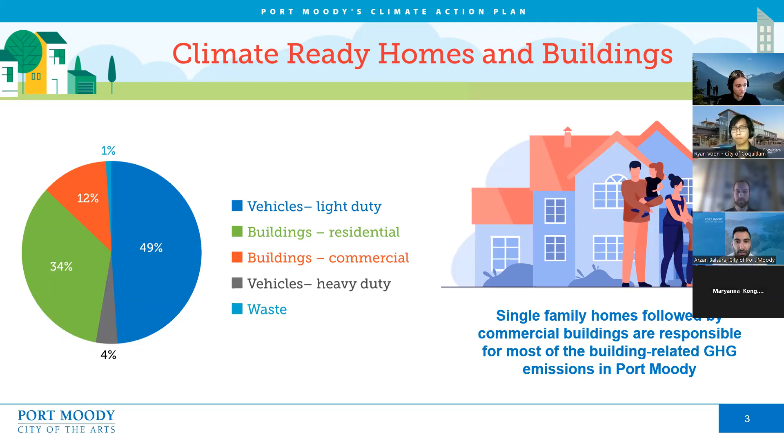So I'll just request that we go to the next slide, please. Port Moody has developed the Climate Ready Homes and Buildings Plan, which was adopted by Council last fall. The plan outlines specific actions that the city, residents, and business owners can take to make homes and buildings in Port Moody climate ready.

So what exactly is climate ready? A climate ready home or building is one that has been designed or modified to meet low carbon and high energy efficiency standards and manage many of the risks related to climate change, such as heat-related illness, poor indoor air quality, or damage from flooding or windstorms.

The screen shows a key target that the city of Port Moody is working towards, and you may be wondering what you as a resident can do to support this. One important thing to remember is that electric heating results in more than 90% reduction in greenhouse gases compared to natural gas heating, due to BC's clean renewable hydroelectricity. Today represents an important opportunity for residents to learn about climate-friendly solutions they can have control over, and that can have a major impact on GHG emissions.

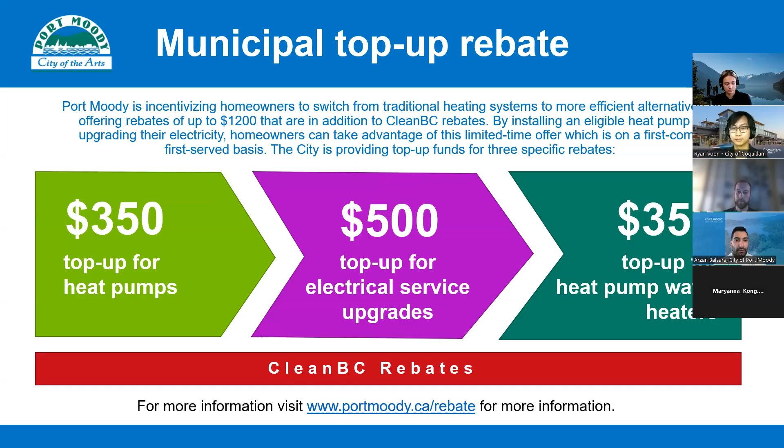You might have already explored heat pumps in the past and thought these things are expensive. Well, we've got good news. Port Moody is proud to say we will be offering top-ups on the already existing rebates provided by the province and federal government. We're offering $350 for a heat pump, $350 for a heat pump water heater, and $500 for any electrical service upgrades that might be necessary as a result of these retrofits. These are all on a first come, first served basis. As Ryan can probably attest, these rebates are pretty popular and tend to get picked up pretty quick. If you would like more information on these rebates or any others Port Moody is offering, please visit portmoody.ca/rebate. And with that, I will pass it over to Ryan.

Thanks, Arzan. Hi everyone, my name is Ryan. I'm a Sustainability Program Specialist at the City of Coquitlam, and thank you all for joining us today. I wanted to briefly share what the City of Coquitlam has been up to regarding our sustainability plans and strategies, and how heat pumps connect to sustainability in Coquitlam.

As part of the environmental sustainability plan, the city updated our greenhouse gas reduction targets to be in line with international, federal, and provincial targets. Coquitlam has targeted a 45% reduction in greenhouse gas emissions by 2030, and targeted to be carbon neutral by 2050. How do we get there?

The next stage in Coquitlam's climate action journey is the development of a climate action plan, which will identify the key policy actions needed to help the city meet those targets and help the community be resilient to climate change impacts. The city is embarking on this journey, and we're going to be engaging with the community sometime later this year. Please keep an eye out on the city's webpage for the latest updates.

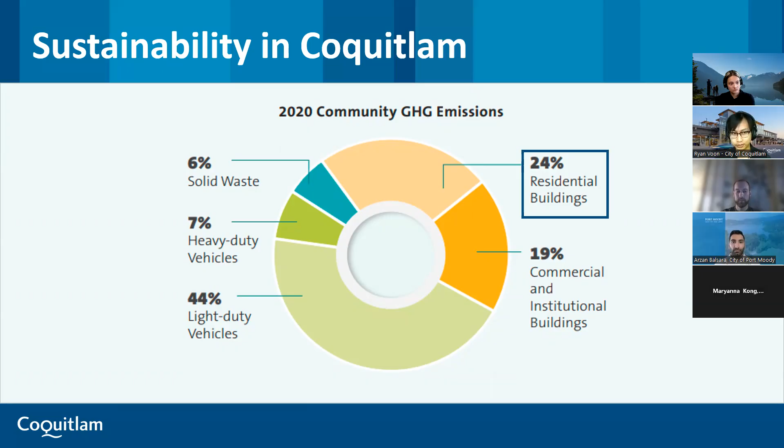Finally, if we go to the next slide, also happy to announce, like Port Moody, residents in Coquitlam have the opportunity to access municipal top-up rebates from the city. If you are living within the municipal boundaries of Coquitlam, you are also eligible for a $350 heat pump top-up, $350 heat pump water heater top-up, and a $500 electric service upgrade top-up, which is in addition to the CleanBC rebates you'll learn more about today. If you want further details on these rebates, visit coquitlam.ca/energyupgrades for more information.

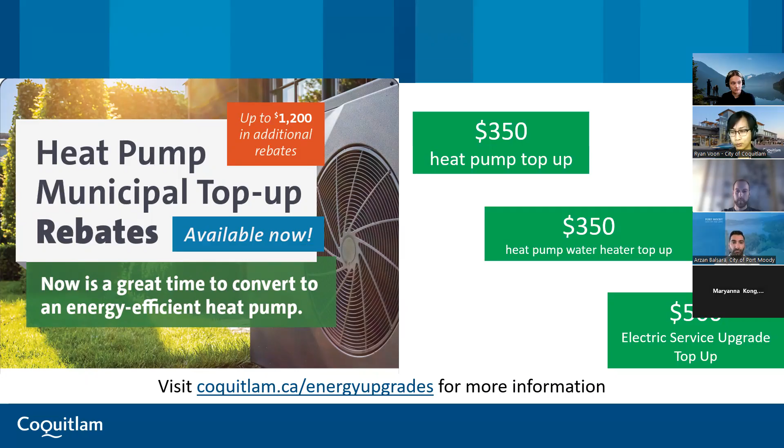And with that, I'll pass it over to Scott. Hey everybody, as mentioned, my name is Scott Walmsley and I'm the environmental coordinator for the City of Port Coquitlam. My role with the city includes the implementation of the environmental strategic plan, as well as the development of the city's urban forest management plan. I'm currently working on the development of the city's updated climate action plan, which is nearing its final stages. This new climate plan is intended to be a science-based plan focused on a low carbon resilience approach to climate action.

We're looking to integrate both emissions reduction initiatives as well as ways we can adapt to climate change. The plan is designed to assess and respond to climate-related hazards and impacts on 5 major sectors: critical infrastructure, natural systems, health, well-being and culture, housing, and economic development.

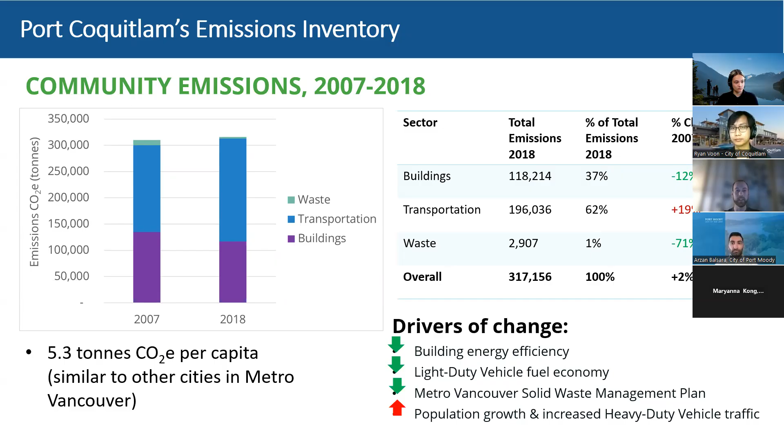If we go to the next slide, in Port Coquitlam our buildings take up roughly a third of our overall emissions. What's really interesting is you can see a change from 2007 to 2018, showing we were somewhat successful in achieving an emissions reduction at the building scale from the last time we did this work in 2007. Things that impacted this reduction include improving building energy efficiency, predominantly through the implementation of the BC Step Code. However, our overall emissions still increased a small amount during that time frame. That sends the message that even though we achieved some modest reductions, there's still a ways to go for us to meet those science-based targets, which is why we're here today.

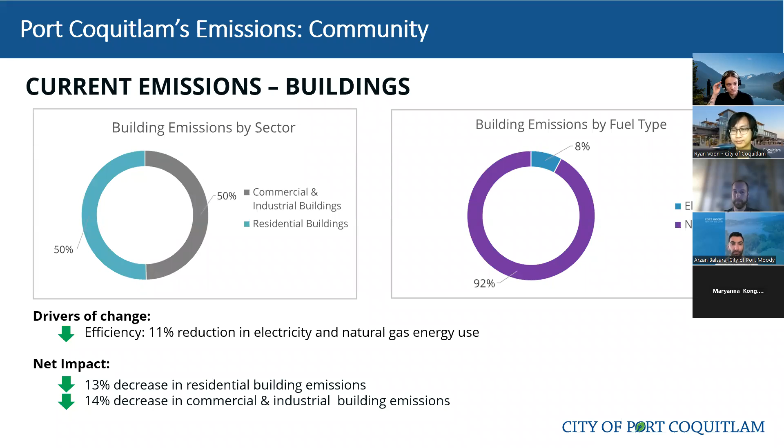Moving forward to the agenda today, we have a fair amount to talk about. I'll introduce heat pumps, why we're hearing so much about them, what a heat pump is, how they work. I'll introduce some of the most common types we're seeing here in BC, as well as some common myths that might be concerns about heat pumps that may not actually be true. A couple of tips to know before you buy a heat pump, including where to find a contractor, and we will of course be touching on rebates and grants towards the end of the presentation.

So why do we care so much about heat pumps? Why are we seeing them everywhere? We get a lot of ads on TV and radio. One of the biggest reasons is we hear a lot about climate change, and we see it day to day as well. We had the heat dome from a few summers ago and wildfire events throughout Canada in the last couple of months. It's climate change and extreme events like the heat dome and wildfires becoming more common that make it more important to look at how our buildings and homes contribute to climate change, as well as how we can adapt and become more resilient to the impacts of climate change going forward. Energy efficient upgrades are one of the best ways of achieving a more resilient and comfortable home as we experience changes to our climate.

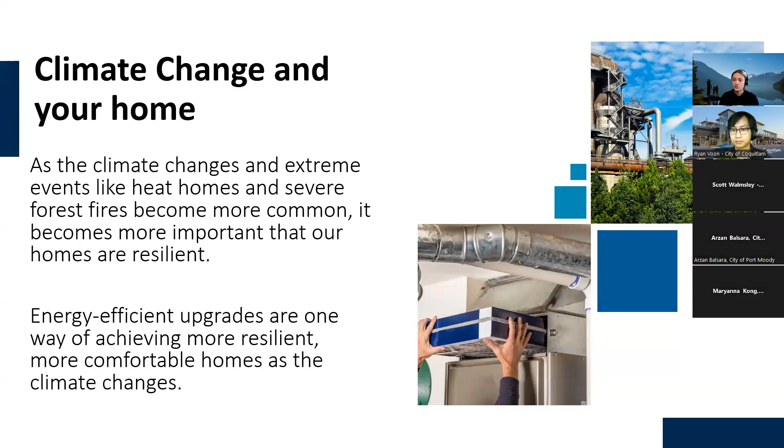Related to that, we have the CleanBC Roadmap to 2030. This roadmap outlines the provincial government's plan to lower emissions by over 40% by 2030. One of the primary methods they're addressing climate emission reduction is through fossil fuel to heat pump conversion. Switching to heat pumps is beneficial here in BC because we're fortunate to have some of the cleanest electricity—about 98% of it is hydropower, which is considered carbon neutral. Heat pumps run off electricity, so that's also why they can be so climate friendly. Yet we're still experiencing roughly 70% of our economy powered by fossil fuels, so how do we start thinking about shifting away from fossil fuels towards clean energy such as electricity?

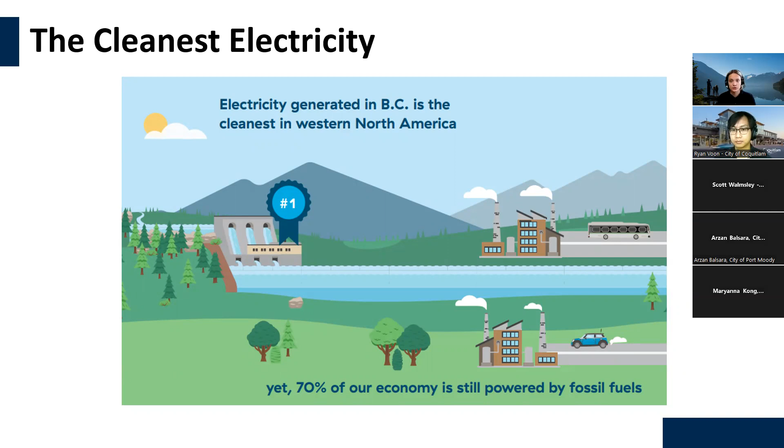A lot of us think electric vehicles have become so popular in recent years. We seem to get very stressed or concerned about idling a gas-fueled vehicle for maybe a few minutes outside. Meanwhile, if you're using natural gas or propane to heat your home, you are essentially idling your home 24/7. So shifting to cleaner means of heat, like a heat pump, has almost a greater impact than even something like switching from fossil fuel cars to electric cars.

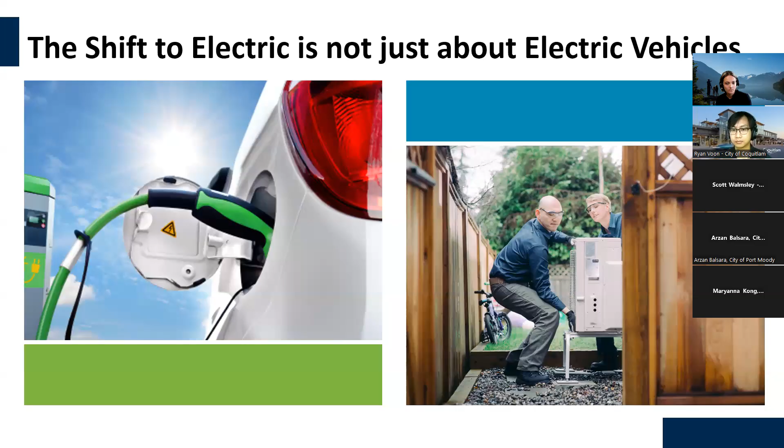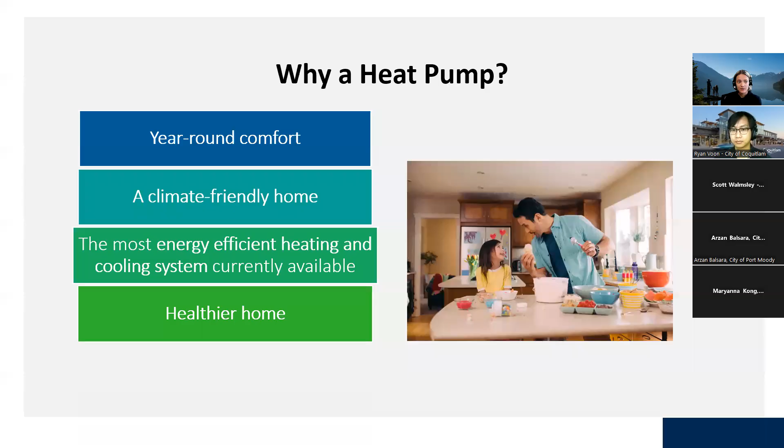There are a bunch of benefits when it comes to heat pumps, which is why they're such a topic of conversation. Going through some of these: year-round comfort, as heat pumps provide not only heating in the winter but cooling in the summer as well, so they're two systems in one. You'll also get a climate-friendly home, shifting off fossil fuels towards electricity. They're also the most energy efficient heating and cooling system available. You can have a healthier home with the air filtration heat pumps offer, and if you're switching from fossil fuel heating, you'll no longer be paying a carbon tax on your energy bill. Now let's dive into these in more detail.

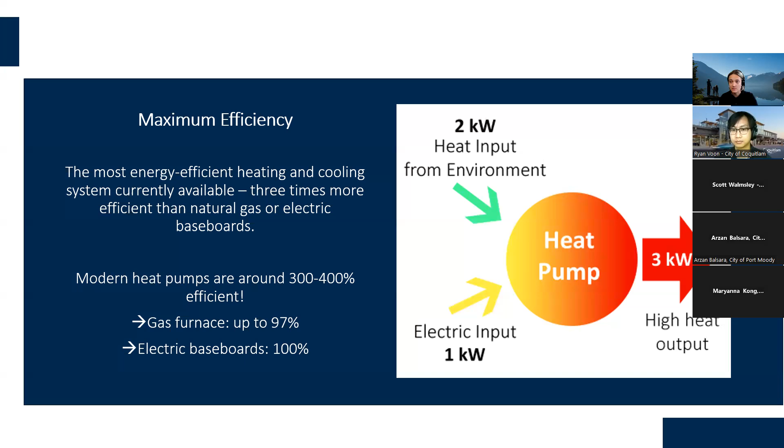Starting with maximum efficiency: heat pumps are the most energy efficient heating system available, typically about 3 times more efficient than a natural gas furnace or electric baseboards. You might wonder how 300% efficiency is even possible. For comparison, electric baseboards are about 100% efficient, and gas furnaces generally up to about 97%. The key reason heat pumps can reach 300% or more is that they're not creating or generating heat—they're moving heat that already exists, pumping it up to a higher temperature and releasing it inside your home. Looking at the graphic, heat already exists in the outdoor ambient temperature, and we add a little electrical input to run the components that pump that heat up and release it inside your home. That's how you get such high efficiencies with a heat pump, because you're moving heat, not generating it.

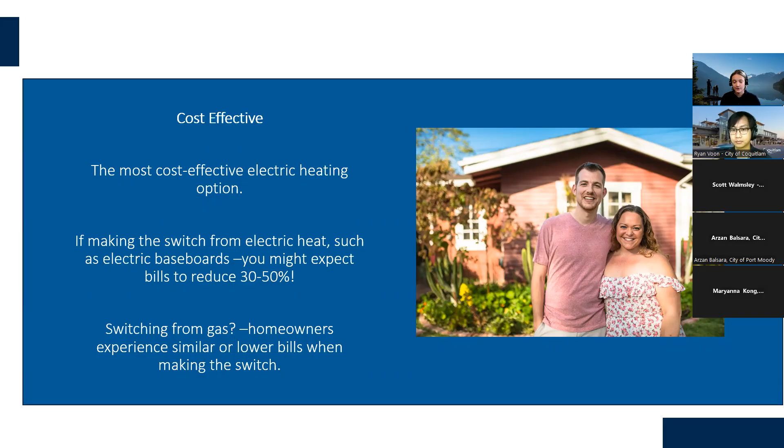Heat pumps are also the most cost-effective electric heating option. If you're switching from electric baseboards or a furnace, you might see reductions of up to 50% on your energy bills—that jump from 100% to 300% efficiency reflects on your bills rather quickly. If you're switching from gas, homeowners often experience similar or lower bills when making that switch.

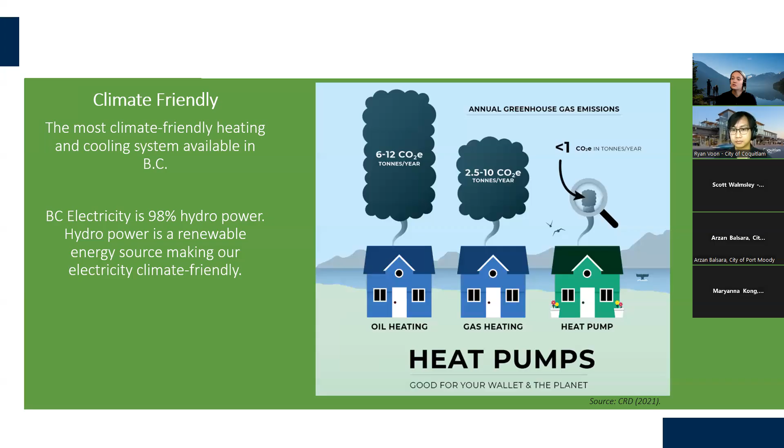You also get a climate-friendly home, as heat pumps are the most climate-friendly heating and cooling system here in BC. As mentioned, BC electricity is about 98% hydropower, which is renewable. Looking at the image, it's no surprise that oil heating has fairly substantial greenhouse gas emissions associated with it. Even natural gas still has a large chunk of GHGs associated with burning it as a fuel source in your home. If you choose an electric heat pump, that will dramatically decrease your household emissions.

You can also have better indoor air quality. Heat pumps provide some air filtration as well as humidity control that can help rid your home of indoor pollutants, dust, pollen, and other allergens. Among the different types of systems I'll share in a couple of slides, there are options for more basic filtration as well as higher-end, high-quality add-ons for filtration, depending on what you might be looking for.

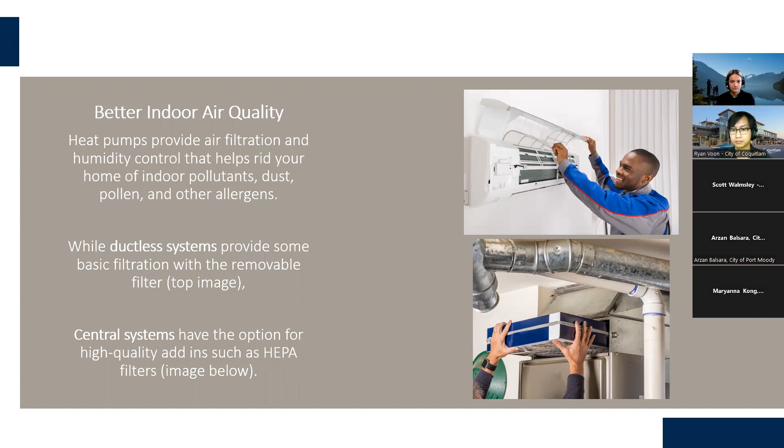We also have cooling and dehumidification—two systems in one. When you install a heat pump, you get the added benefit of cooling in your home, so you can be better prepared for extreme events such as a heat dome, making sure you, your loved ones, and your pets can stay comfortable inside. They also have a dehumidification option if you're looking to reduce indoor moisture in the home.

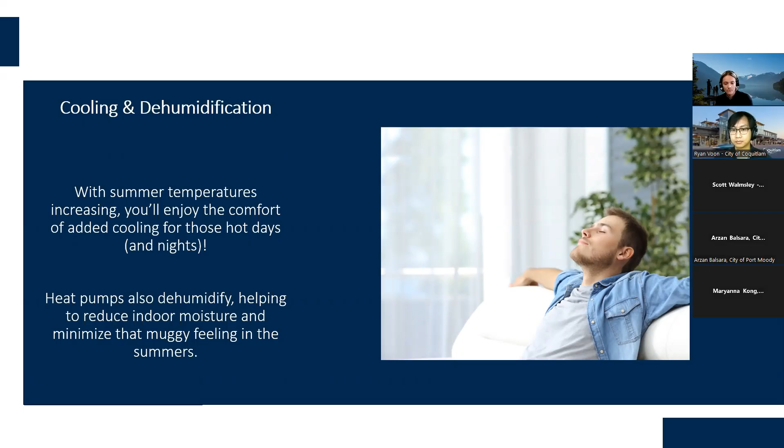Heat pumps also practice a great set-it-and-forget-it approach. Unlike a gas furnace, where you might adjust the temperature settings multiple times throughout the day, a heat pump is best left alone—set it to your desired temperature and let it do its thing. It operates most efficiently when you practice set it and forget it, making it easy so you don't have to worry about adjusting the temperature throughout the day.

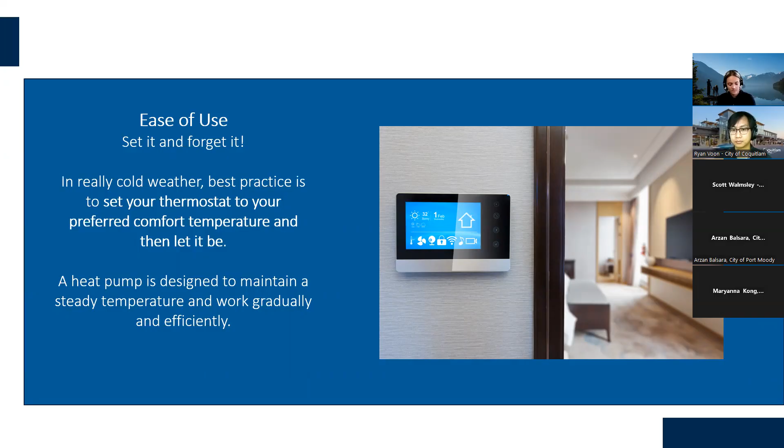There's also the option for zonal heating, especially with something called a ductless mini-split heat pump. You can really customize the system to suit your home. Zonal heating allows you to have different temperatures—for example, if you have an in-law suite and they like it a bit warmer or cooler than you do, you have that flexibility for different temperature zones with a heat pump.

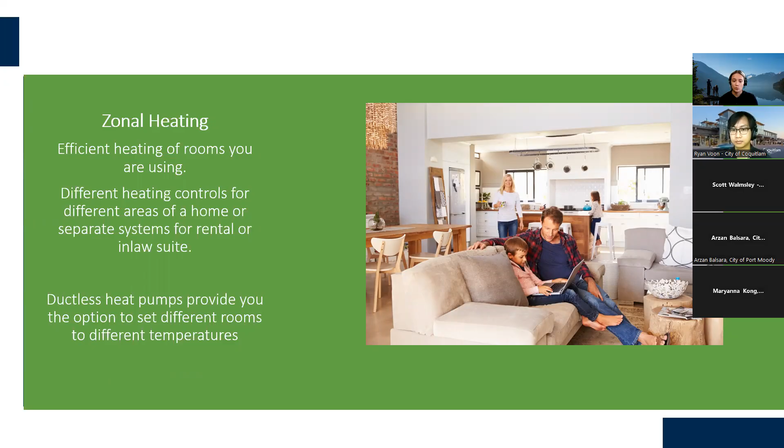Now, to really wrap up all of these great benefits, heat pumps are the heating system for the future. Just like electric vehicles, we've seen this shift. More and more cars are shifting to be exclusively electric off of fossil fuel. We're seeing that shift in home heating as well, moving off of fossil fuel towards electric heat pumps. They really are quite simply the Tesla of heating systems, if you will, making your home ready for the future.

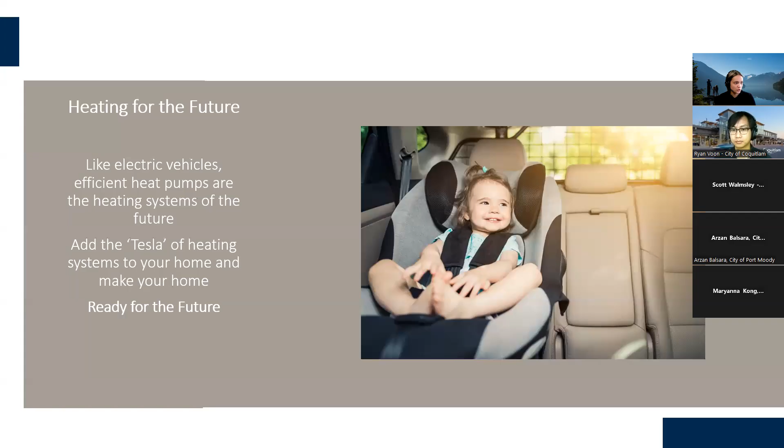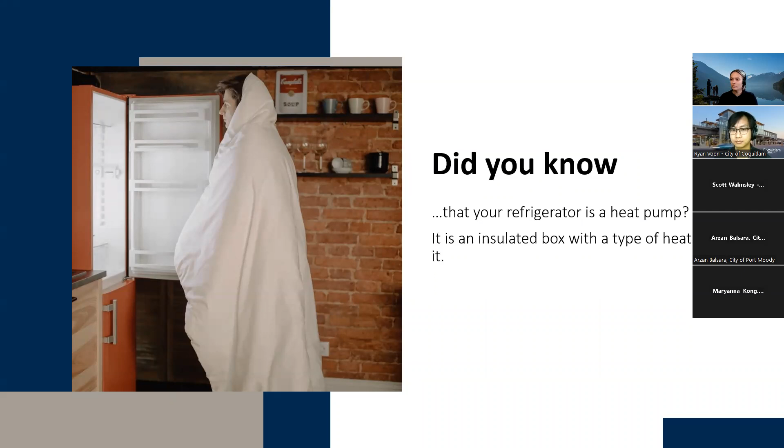Now, I've spoken on this a little bit, but to dive into heat pumps in more detail and how they work, you may be surprised that you already have a type of heat pump in your home, because your refrigerator is essentially a heat pump. Refrigerators work where the coils in the back of the fridge help remove the warm air inside your fridge, releasing it out the back. And that cycle continues, ensuring the drinks and food inside your fridge stay nice and cold.

And a heat pump is really no different. I'm sure we often avoid looking behind our fridge, or at the bottom, depending on how old it is, but if you take a look, you'll see those coils, and they're often pushing out heat if you put your hand close to it. So that's the heat pump in your refrigerator working to remove the heat from inside the fridge.

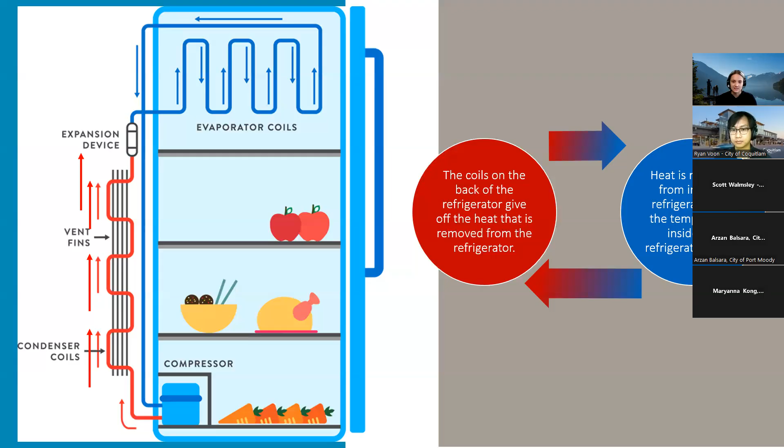Now, to hear a little bit more about how heat pumps work, I'm going to pass things over to Dave at BC Hydro.

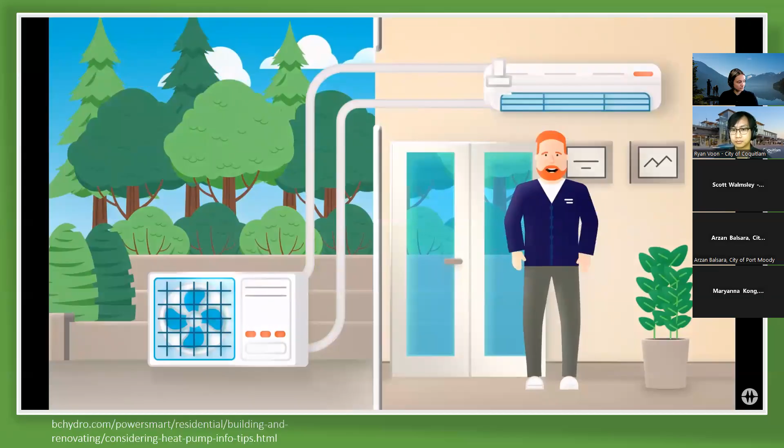Hey, it's me, Dave, and this is a heat pump. It's an energy-efficient heating and cooling system you can install at home. How does it work? Here, let me show you. Your typical air source heat pump, like this mini split system, has two main components, an indoor and an outdoor unit, which are connected by a refrigerant line.

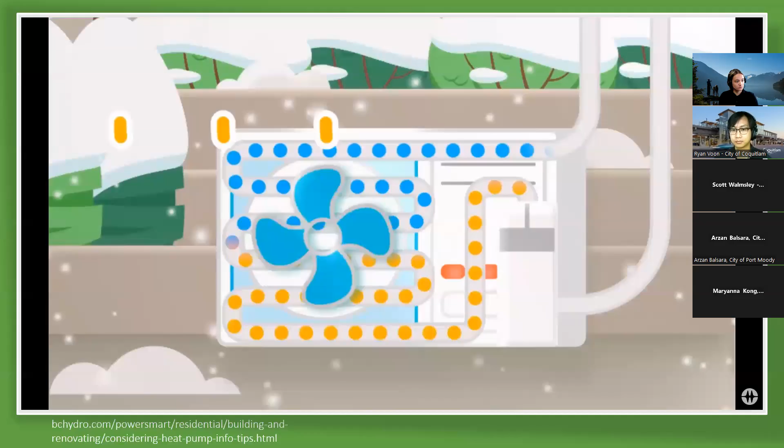To heat your home in the winter, the outdoor unit pulls heat from the air outside your home. Yes, believe it or not, even when it's cold, outside air still contains a certain amount of heat. The warm air then goes through a refrigerant coolant that is compressed to increase the temperature even more. This warm air is then pushed through to the home.

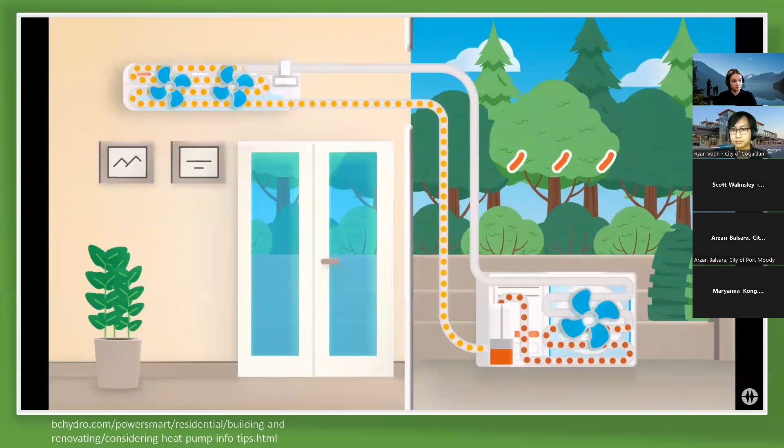In the summer, to cool your home, the process is reversed. The heat pump absorbs the warm air in your home and transfers it outside. The compressor circulates refrigerant to the indoor evaporator coil, and the refrigerant absorbs heat as it passes over the indoor air. The resulting cool and dehumidified air then gets blown back into the home. And that's how a heat pump works.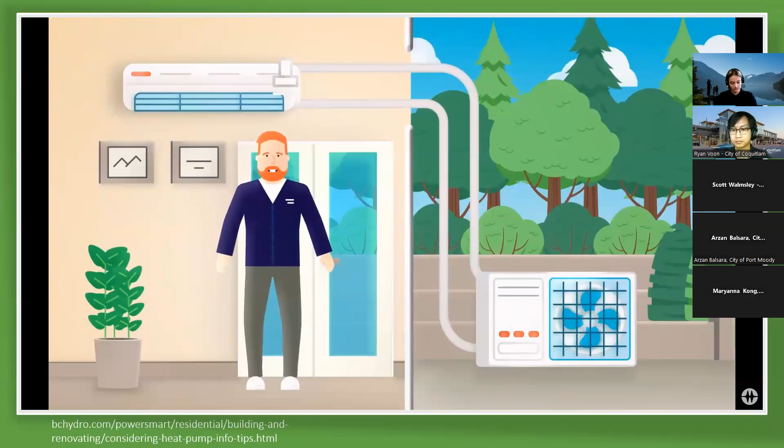The key here is that heat pumps don't generate heat, but instead they move it from one place to another, which is why heat pumps are so energy efficient. In fact, a heat pump can be up to 300% more efficient than electric baseboards. So if you already have electric heat, a heat pump can help you save on your energy bill.

Less energy and more savings? I like it. If you're switching from a fossil fuel-based heating source like a natural gas furnace, you'll be reducing your carbon footprint. It's kind of like going from a size 18 down to a size 2. You get the idea. It's an environmentally friendly option, especially here in BC where we're powered by water. Plus, with rebates from CleanBC and BC Hydro, there's more to save.

Thank you, Dave. Alright, well, we've already seen one type of heat pump from that video, but starting with another type, we have the central ducted system. These systems utilize ductwork connected to vents in your home to provide whole home heating and cooling. They're often a great option to replace a gas or propane furnace when you have that existing ductwork in your home.

They will often be connected to a slightly larger outdoor unit connected with refrigerant lines to an indoor air handler. That would be the sort of box, if you will, that replaces the furnace, often found in your mechanical room, and it would distribute that warm and cool air throughout your home all season long. They're connected through a wall thermostat, just like a furnace, to make those temperature adjustments.

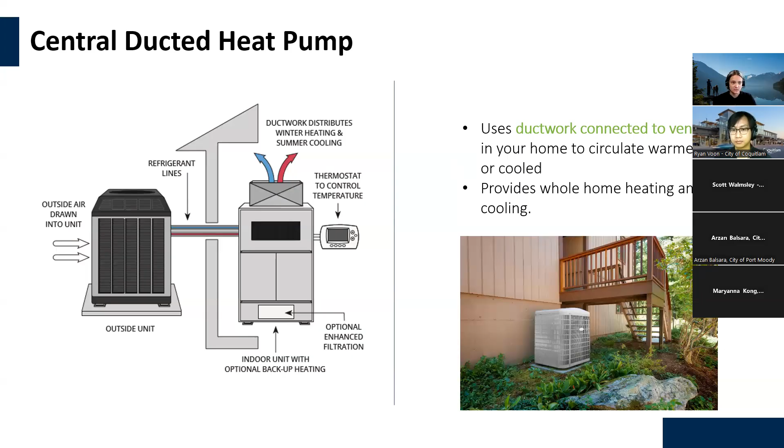The other type of system we see quite often is a ductless mini split heat pump. These systems provide zonal heating and cooling through indoor heads or units. You don't require any ductwork at all for this type of system. They're generally about three quarters of the way up on a wall, providing that zonal heating. They can be a really great option if you have electric baseboards or maybe an old boiler and don't have ducts for a central system.

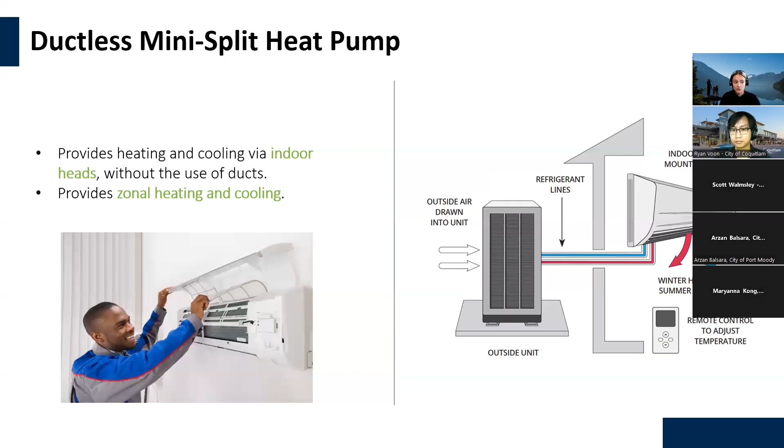That doesn't mean you don't get to install a heat pump. These are a great option. They can be connected to one or multiple indoor heads. Based on the graphic here, we have a somewhat smaller outdoor unit connected to refrigerant lines that go to the indoor head. If you have a few different heads, there might be a different line to that indoor unit, and each individual unit would be controlled through a remote.

To compare the two quickly, both the central and ductless options will provide air conditioning, where the ductless option is the one that will truly give you that zonal heating option. Central systems are the only ones that require ductwork, and they will both provide air filtration and dehumidification.

For those ideal installation scenarios for a central system, realistically we have existing ductwork in the home. We're looking for that central heating and perhaps more effective air filtration, with options for high quality add-ons with a central option.

In the case for ductless, we are looking for zonal heating, perhaps an open concept layout or a home with no ducting, replacing electric baseboards or even a wood stove. Maybe you're interested in removing ductwork, perhaps making your basement suite a more livable space, adding some ceiling height. That can be a great way to get rid of that ductwork and install a more efficient heating and cooling system in your home.

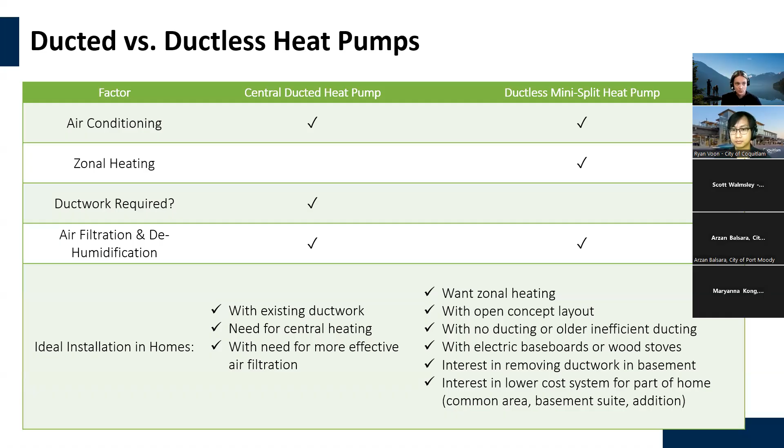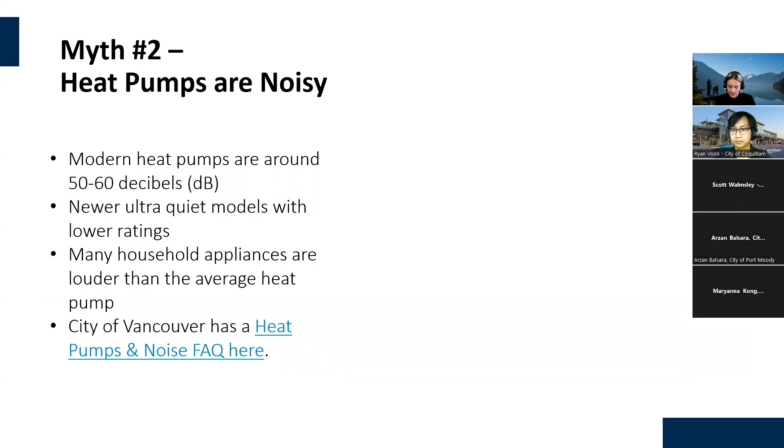Another myth is that heat pumps are noisy. And while older systems definitely could make some noise...

Oh, apologies, not sure what happened there. Finding my slide here. Everyone can hear me okay still? That was just a little tech hiccup. All good? Thanks, Ryan. Sorry about that.

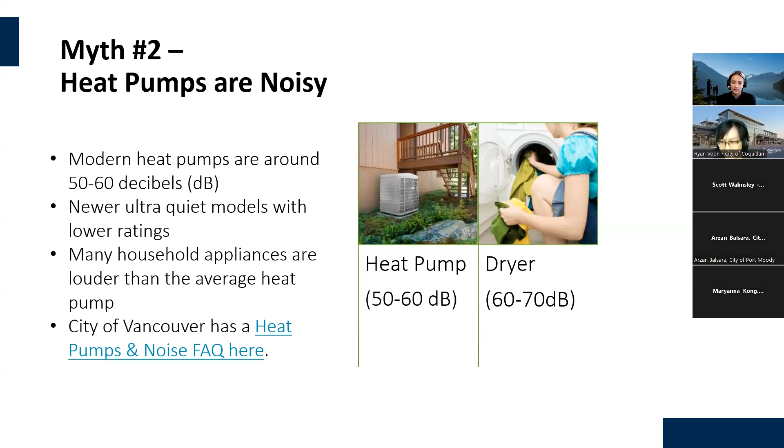As I was saying, a myth we hear is that heat pumps are noisy. While older systems definitely could make some noise, the technology has come a long way. Modern heat pumps are typically around 50 to 60 decibels, with new ultra quiet models being even quieter than that. You'd be surprised that many average household appliances are louder than a typical heat pump. Here we have a dryer that's actually a fair amount louder, at 60 to 70 decibels, and even the sound of a toilet flushing is going to be quite a bit louder than that. Keeping in mind, when we talk about the noise associated with a heat pump, most of that concern comes from the outdoor unit. So really, noise should not be a concern, as they are much quieter than in years past.

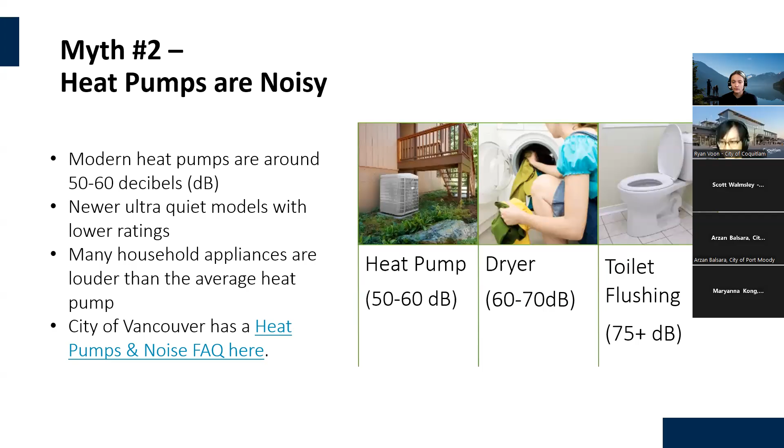For a bit more information on noise, as well as key considerations for siting or placing that outdoor unit, the City of Vancouver has a really great FAQ. It's linked in the slide that you'll receive a copy of following this webinar. It goes over some great tips and tricks on ways to use landscaping and other things to help deter some of that noise that may come from the outdoor unit.

Moving on to myth number 3: heat pumps need a lot of maintenance. Well, really, just like any other heating system, they do require typical regular maintenance. So similar to a furnace, best practice is to schedule a servicing appointment every 1 to 2 years to make sure the system is running smoothly. You can also do some general maintenance yourself, such as cleaning the filters and making sure the outdoor unit is clear of any debris. This will help ensure the system can work better for you in the long run.

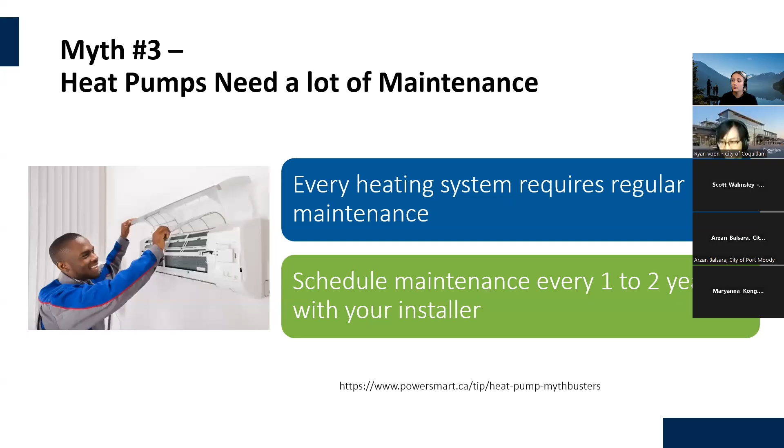Myth number 4 is that heat pumps are expensive to operate. Now, this one does come with a fair amount of text on the screen here, and to really break that down: homes with heat pumps can have comparable to lower operating costs than a natural gas home. There are some key considerations around that.

The first one is you will, of course, see changes to your hydro bill. If you're replacing electric heat with a heat pump, you will see a decrease in your electricity bills, since you're going to a more efficient heating system. Now, if you're replacing something like a gas furnace with a heat pump, you will likely see an increase in your hydro bills, since you're switching from gas as your primary heating to electricity as your primary heating.

So you're likely to use more electricity, but this will be offset by a decrease in your fossil fuel consumption. The best ways to ensure the heat pump will work efficiently and be friendly on your energy bills is to purchase a high efficiency system, and to ensure it's installed properly with a quality contractor. You can also do other home upgrades to make the system run more efficiently, such as added insulation, high quality windows and doors, air sealing, and draft proofing. This will all help ensure your home has lower energy bills.

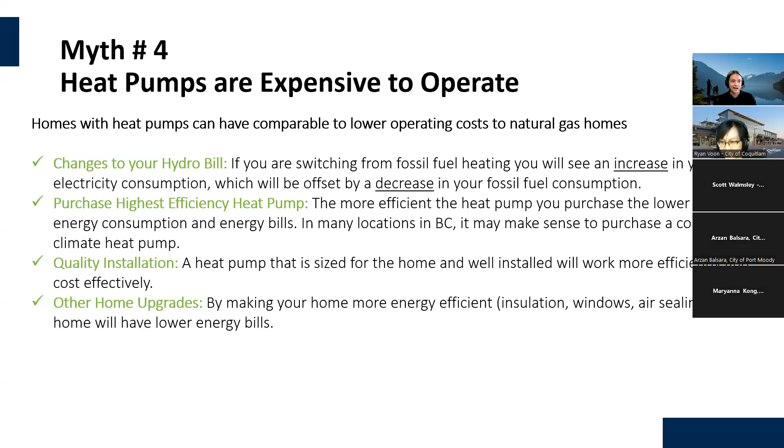One of the last myths here is that heat pumps don't work in cold weather. Now, again, the technology has come a long way, and we have these systems called cold climate heat pumps that are pretty incredible. They can operate in temperatures as low as -25 degrees Celsius.

We have even seen these systems working in colder conditions than that, and they will have what's called a higher HSPF, or heating seasonal performance factor -- that's the efficiency during the heating season in the wintertime. So they'll have higher efficiencies in the winter, able to maintain high efficiencies as the temperature drops colder outside. We see examples of these systems all throughout North America, where colder temperatures are experienced than anything we'd perhaps experience in the Lower Mainland or on Vancouver Island.

This photo here is taken from Colorado, and they do experience some pretty chilly winters. This particular photo was taken to highlight that these systems do, of course, work in -25 degrees.

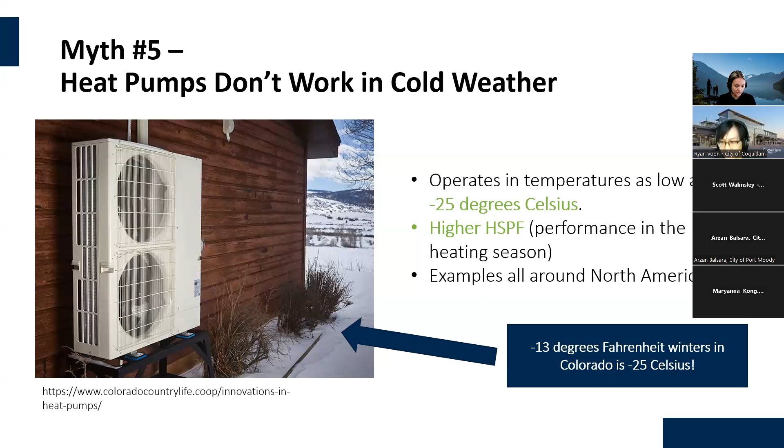And there is also a rebate program in Nova Scotia, so they are promoting heat pumps quite heavily there as well. They do have some pretty cold winters, ranging at about -18 degrees. So heat pumps absolutely can work in the winter season.

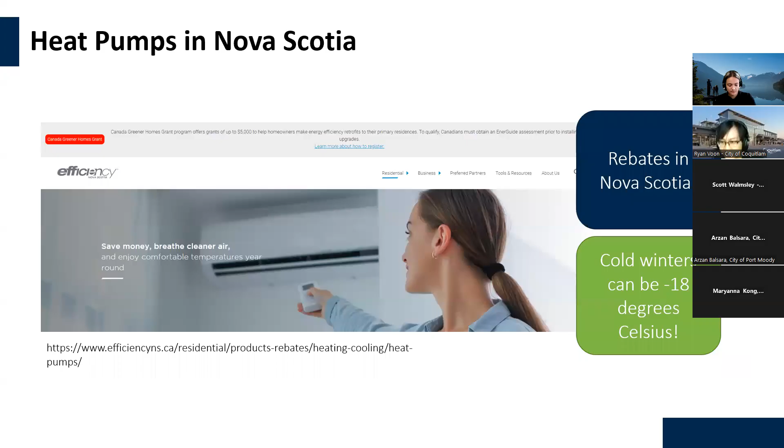A couple of things to keep in mind before you go ahead and purchase a heat pump. You do want to ensure you're working with a qualified installer. This means avoiding any type of do-it-yourself installations or buying wholesale or online. Contractors will receive some pretty specific training on one or a couple of brands, so they really do know and are familiar with these brands. Choose a qualified installer.

Be sure to obtain multiple quotes, as I just mentioned. Contractors will have training on one or a few brands, and there are a handful of excellent brands and contractors out there. So you want to make sure you're getting a good variety of quotes before you make your decision.

It's always best to practice the house as a system approach. This speaks to how your home works as a system -- you change one component of the home, it will likely impact the other. The best example of this is ensuring that you handle air leakage and address insulation issues before purchasing a new heating system. This will make sure it works better. Oftentimes you can size a more effective system, perhaps even size a smaller system, if you address a lot of the air leakage in the home.

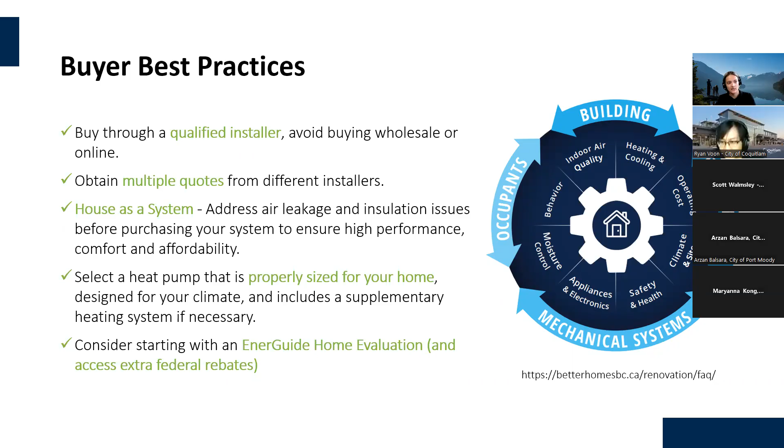To really understand all of these different things, it is recommended to start with an EnerGuide home evaluation. There is some extensive home modeling done to see how your home uses energy, as well as where improvements can be made. Energy evaluations are, of course, step number one in accessing the federal incentive program as well, and I'll get to those rebates and other incentives in just a few slides.

So now, what rebates are available if we are looking at installing a heat pump? To learn more about all the different offers, your best place to gather this information would be the provincial website, betterhomesbc.ca. This resource is really your one-stop shop where you can learn about specific products, heat pumps, and also the various rebates and how they apply to your specific scenario.

And if at any point you're confused or overwhelmed, there is the CleanBC Energy Coach service. This is a free service available to homeowners throughout BC, and they can provide direct support to help navigate the various rebates that are available. If you need help checking products before you go ahead with an install, or have any questions, this is a great resource to use.

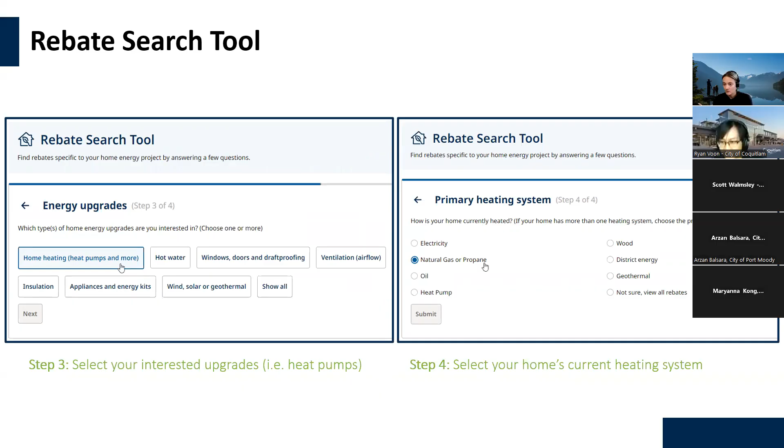To first navigate what may be available for your specific home, I recommend using the rebate search tool on the provincial website. It has a few different steps to narrow down what might be available. You start with your project type, whether it's a renovation or building a new home, followed by your specific location. Then you click what upgrades you're most interested in, or just show all if you're not too sure. Finally, you'll select your home's current primary heating system, whether that's electric baseboards or gas furnace, and you'll get a list of results of what might be available. You can click into those individual pages to learn more about the specific rebates.

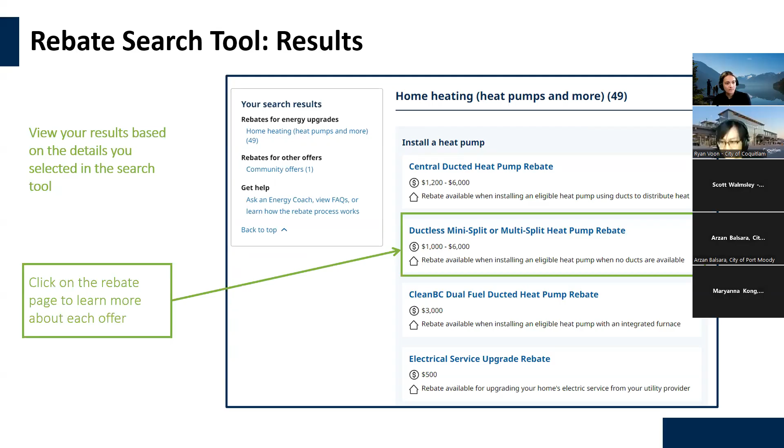To highlight the specific offers, the provincial CleanBC program has a few subsets of different programs. There's the Better Homes program, or the main rebate program, which offers renovation rebates for homeowners across BC. They have rebates of up to $6,000 when installing a heat pump, plus those municipal top-ups where available.

There is also an income qualified stream of the program, which offers enhanced rebates for income qualified households. Those rebate amounts for a heat pump are up to $9,500.

One of the additional programs is a low interest financing program—it's actually a zero interest program. So there's a zero interest $40,000 loan when you are replacing fossil fuel heating with a heat pump. This is an alternative to the regular provincial rebates, so it's the loan or the rebates.

There is also this fun bonus offer called the group purchase rebate. This is up to $500 per home when replacing fossil fuel heating with a heat pump. You can join an existing group or start your own group and promote it. The more people who join using the group code in their application, the larger the group, the larger the rebate.

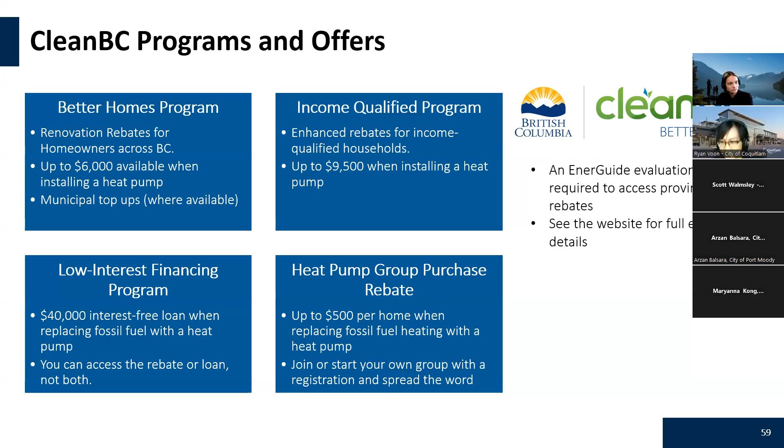Now, speaking more to heat pumps in particular, if you do have an electrically heated home—electric furnace or electric baseboards—there are rebates through the province of up to $2,000: $1,000 for a ductless mini split system, or $2,000 if you're installing a central ducted system. The federal program offers up to $5,000 depending on the specific system you choose to install. Pulling those together, you can access anywhere from $6,000 to $7,000 when stacking the two programs together.

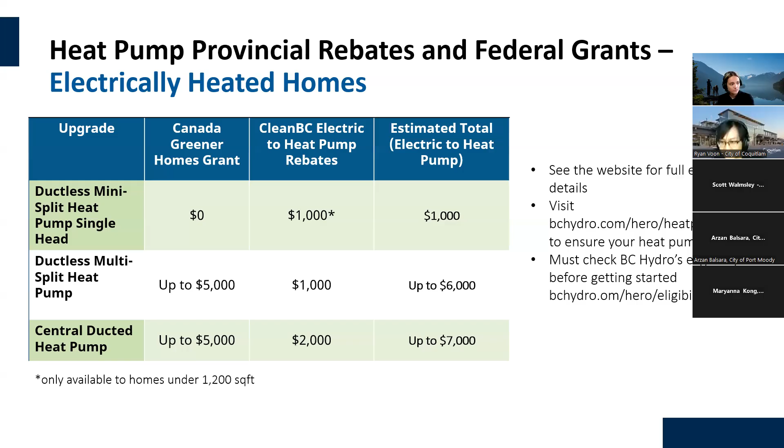Now, for those fossil fuel heated homes, we do have some larger incentives. The provincial program offers up to $6,000 if you are replacing fossil fuel heat with a heat pump, and the federal grants are up to $5,000. So if you stack that all together, you can get upwards of $11,000 across both programs when replacing fossil fuel heating with a heat pump.

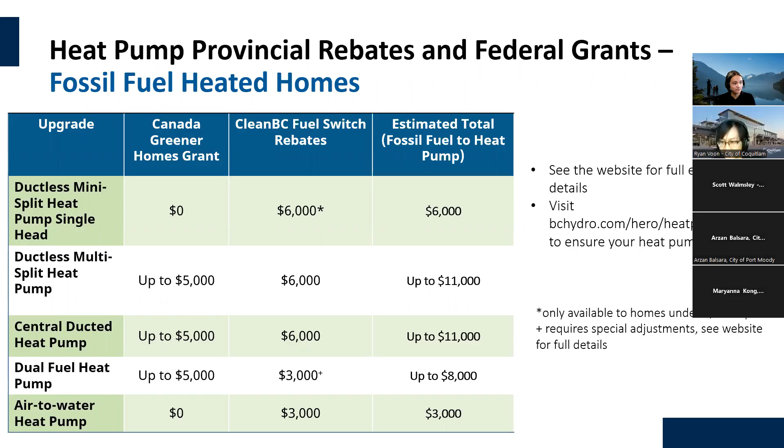To speak to the federal program in a little more detail, there are three branches of that program: the grant, the loan, and a somewhat newer offer, the oil to heat pump affordability program.

The grant is up to $5,000 towards upgrades and up to $600 towards an EnerGuide home evaluation. Homeowners are required to register online, and you do have to complete a pre and post retrofit EnerGuide home evaluation to access this offer. So before doing any upgrades in the home, step one is to register and get that pre-retrofit evaluation done.

To access the federal program, the home needs to be your primary residence as the legal homeowner, and would not be applicable to renters or rental homes. Again, the grant can stack up to 100% of the total cost with the provincial rebates.

Now, the federal program also offers a zero interest loan of up to $40,000. This is in addition to the $5,000 grant, and it can be used towards a slew of different upgrades they offer incentives for, whether it's a heat pump, windows and doors, insulation, even solar. The evaluation is still a requirement, with a repayment period of the loan over 10 years.